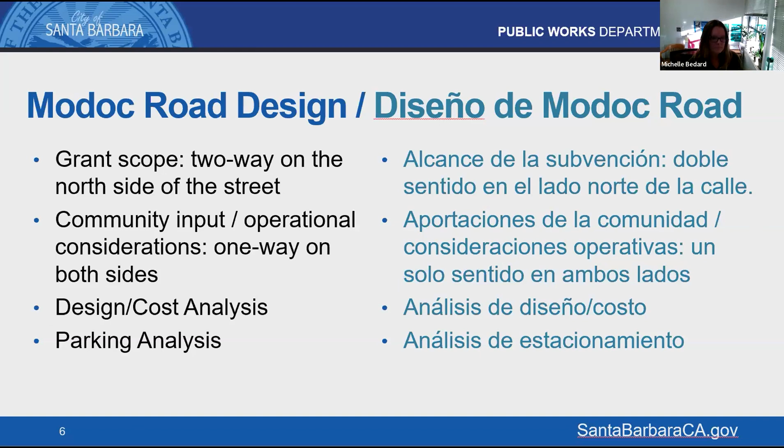One of the benefits of transitioning to a one-way design is that the two-way design, with the limitations of the existing right-of-way, would have resulted in a rather narrow bike path for a two-way configuration.

This is an example picture from J Street in Davis of a two-way design, street level bike path protected with bollards. Keep in mind, this design is wider than we could have fit into the existing Modoc Road right-of-way.

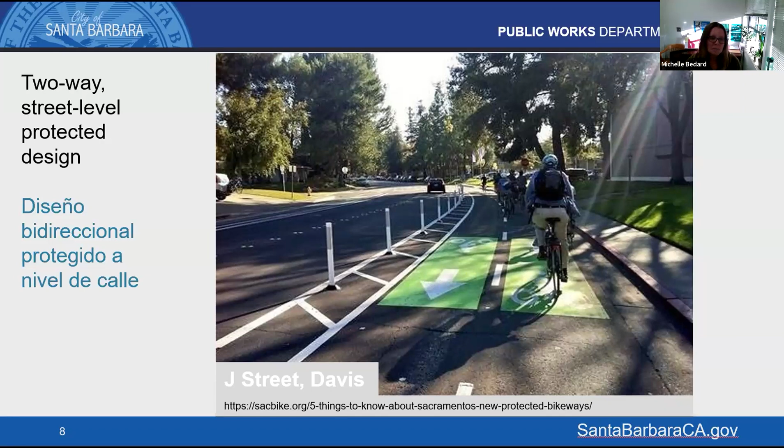Now for the revised design. In plan view, after receiving community feedback, the project team evaluated the design, connections to existing bike facilities, and impacts to on-street parking, and is presenting this revised concept plan for a one-way bike path located on each side of Modoc Road between Mission Street and Las Positas Road.

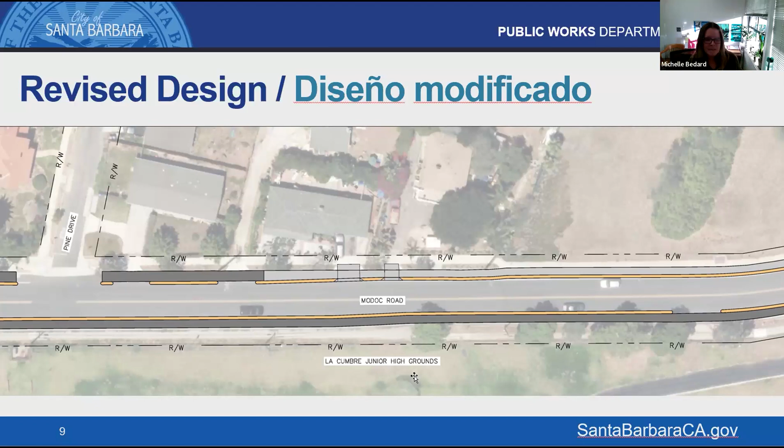In the next few slides, I will share a few examples of these types of designs. Our concept is what we call a one-way path, street level, curb protected design. This is an example from NACTO, the National Association of City Transportation Officials, providing a visual representation of a proposed one-way street level curb protected bike path.

In this instance, you'll see sidewalk on the right, a landscape buffer between the sidewalk pedestrian zone and the bike lane, and then a curb protected buffer between the bike lane and the vehicle lanes of travel. This demonstration also shows parking and vehicle lanes of travel to the left.

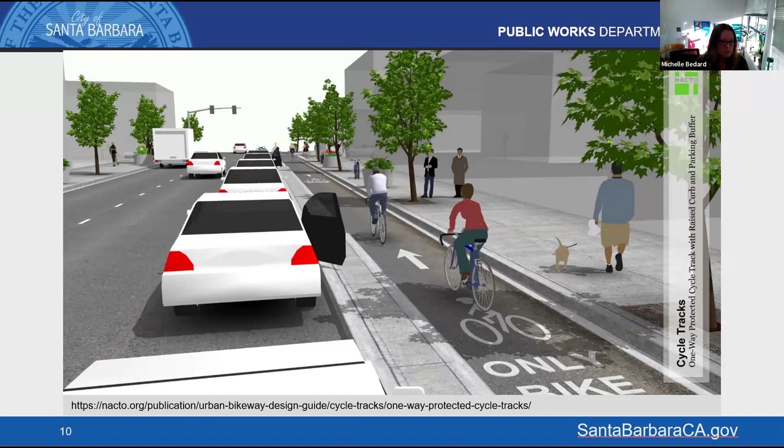Just again, a picture view - this is a recent example, 17th Street in Santa Monica. This is the kind of design we are looking at for an on-street level curb protected bike lane.

Just a few more pictures and examples, also from 17th Street in Santa Monica, so you can get an idea. The sidewalk is over here on the right, separated with some landscaping, and then the on-street bike path with curb protected barriers. Similar examples on both images.

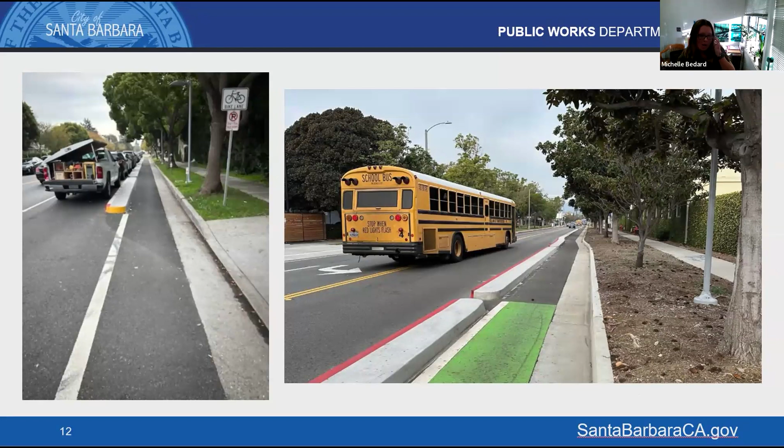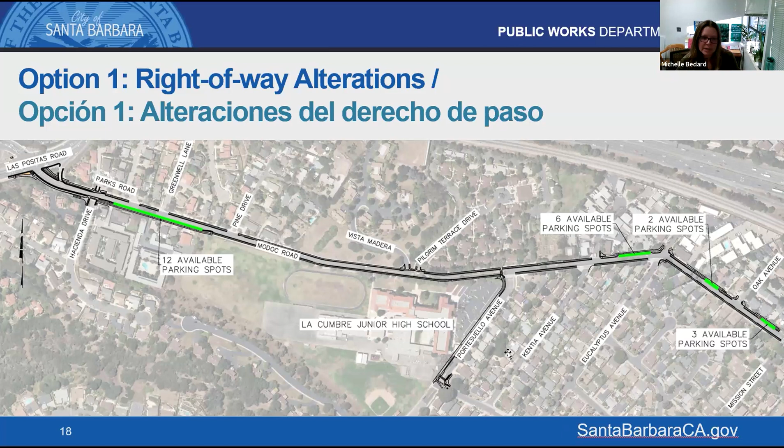Those alterations are primarily focused in this area, which is why option 2, which does not involve alterations in the right-of-way, does not have those additional parking spaces.

Option 2 involves 12 new on-street parking spaces. These would be permanent new parking spaces offered 24/7, day and night, within the public right-of-way. This is between the firehouse and Hacienda Drive on the west side, just before Las Positas.

As previously mentioned, staff is continuing to study opportunities to maximize additional new on-street parking between the fire station and west of La Cumbre Junior High.

Just to point out, you might ask why they can't provide parking on the whole stretch of Modoc between Las Positas and Mission Street. The key component of the project is to provide safe modes of travel for all road users: pedestrians, cyclists, and vehicles.

The opportunities for new on-street parking are limited and will be focused in areas where the street maintains adequate visual sightline distances and sufficient safe widths for all road users, meeting minimum road vehicle travel lanes and minimum bike lane widths.

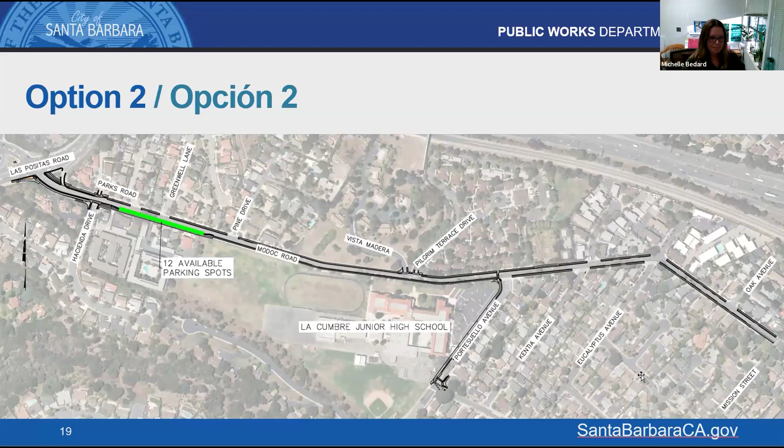That's a lot in a brief amount of time, but just to quickly share the next steps: we'll continue to hold community engagement meetings. We want continued community input on the design before we prepare final design plans.

We have to go through the environmental review process. We'll also go through courtesy review boards by the city boards and committees. Construction is anticipated in 2027.

This is a large project with many different components, so we hope construction will begin earlier than 2027 wherever feasible.

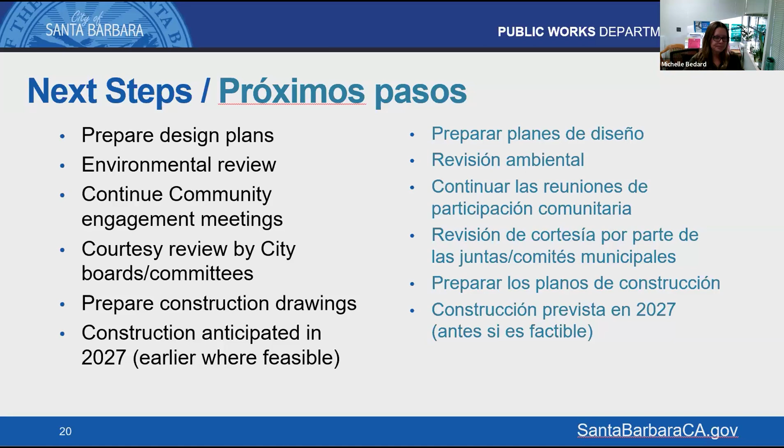Just to share how to stay involved, this is the city email and project web address. You can attend public hearings and community engagement meetings, which will continue to be posted online and to our project website. We go through many news source avenues to publicize our community outreach meetings.

We want people to attend. We want people to share their voice.

So again, I'll use this opportunity just briefly to say, if you can, please attend tomorrow's open house. It will be held at La Cumbre Junior High at the same hours, 5:30 to 7. You'll have the opportunity to review the plans in person, ask questions of staff, make notes, and provide your input.

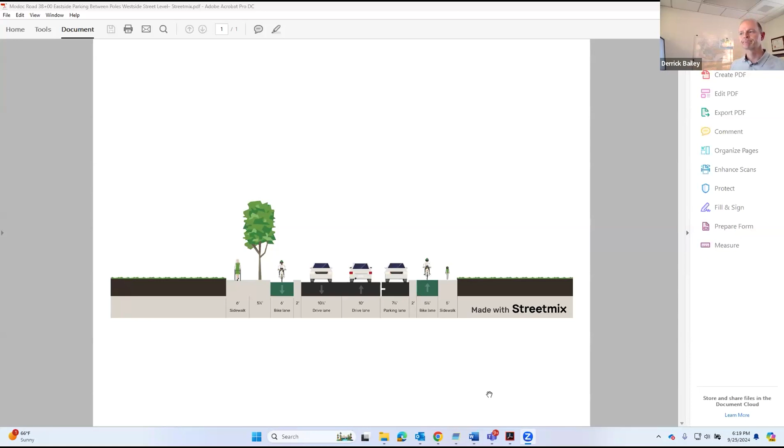I'm going to stop sharing now. One question, Derrick - I'm not sure if we have the most recent data - how many riders are currently using the on-street bike lanes? I can look that up while you're answering questions. Okay, if we have anything. Great.

One comment was just thank you for reconsidering it, having a one-way path on both sides. This person was very happy that we're listening to the community and implementing this change.

Teresa, there was one question that was in Spanish.

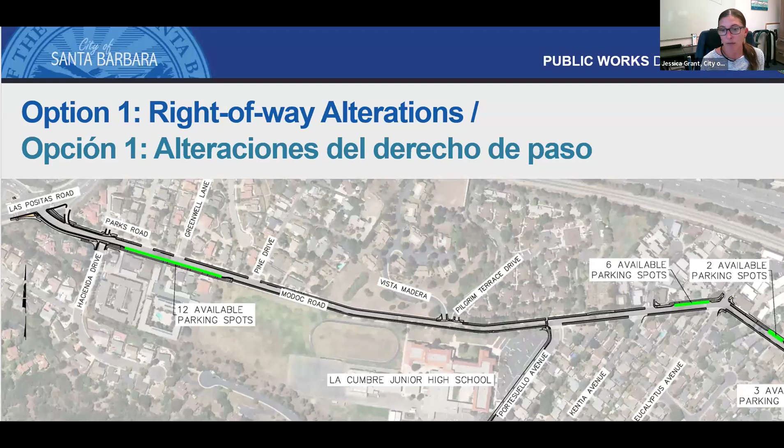The question is from where to where would the parking be, 7 days a week? Michelle, if you could navigate to that screen showing where there would be additional parking in both options. Teresa, if you could translate: yes, but roughly just north of La Cumbre Junior High and Hacienda Drive, and then approximately south of Kentia Avenue to Mission Street. Okay, thank you.

One question was about tomorrow's meeting. It's an in-person meeting, an open house format. It's the same material we'll be covering, just without a formal presentation. We know everybody's busy, and sometimes they just need 10 or 15 minutes to take a look, and then they can be on their way. So if you've had the webinar tonight and then have a bunch of questions come up, you can meet with us in person to follow up on additional details. So it's just a little bit more personalized in the in-person format, but we love the webinars too.

I can't thank the community enough for all the great questions that you have.

Hey Jessica, just while you're looking for your next question - counts done last January, so January 2024 at Modoc and Portesuello, there were 2 days worth of counts, and there were between 300 and 350 per day. So that was January, so we'd expect that to be a little on the low side, as cycling activity tends to drop off a bit in the winter.

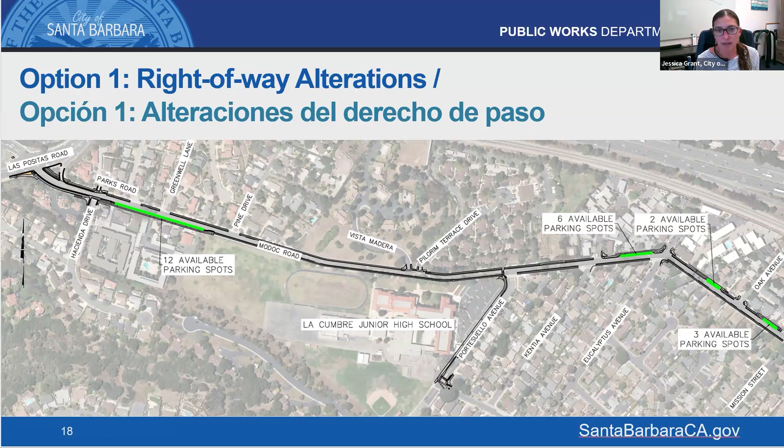Michelle, if you could go back to the last slide of how to contact us. You could follow up in an email, because I don't have a name contact to go with that question. If you could send us that question, we can get back to you later on that.

Just an appreciation comment: love having the multimodal paths around town. Great for families, runners, with strollers. So the project is much appreciated. Thank you for that comment.

The city spent a lot of money making a new bike path on Mission and San Pasqual. I'm assuming that this new proposed bike path on Modoc would connect to San Pasqual. This bike path is blocked for hours on a daily basis by taco vendors. Is the city going to allow these vendors to use the new bike path in the same manner? Thank you for that comment.

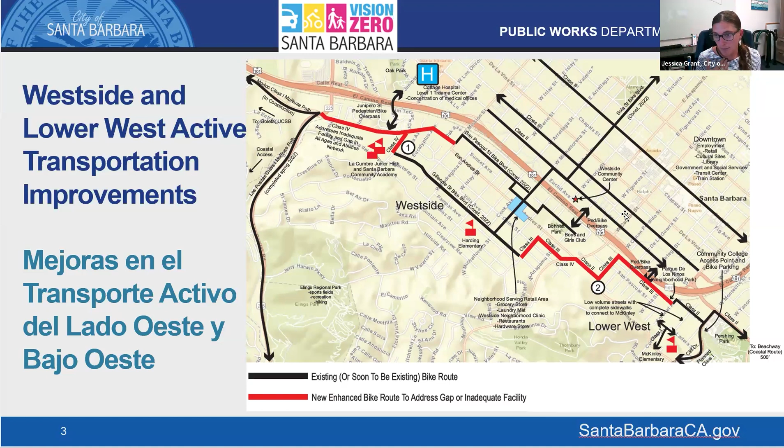Yes, this path does hook into that multi-use little path segment. It's a very little piece, but such an important piece of a bike route connection. So if you're coming from the San Pasquale neighborhood going to La Cumbre Junior High, you could hop on that little multi-use path section and then go right into the protected bike lane. And the vendor issue is on the radar. There's been lots of enforcement on that, but feel free to reach out if you see more observations, so there is a dedicated team for that. They are not allowed to vend on bike paths.

Can you go over the improvements on Pedregosa and Manitou again? Oh okay, yes, right there. So that's a critical missing piece link of sidewalk. It's kind of a blind turn, but it's a very popular walking route in the neighborhood, so a sidewalk would be filled in there where currently there is none.

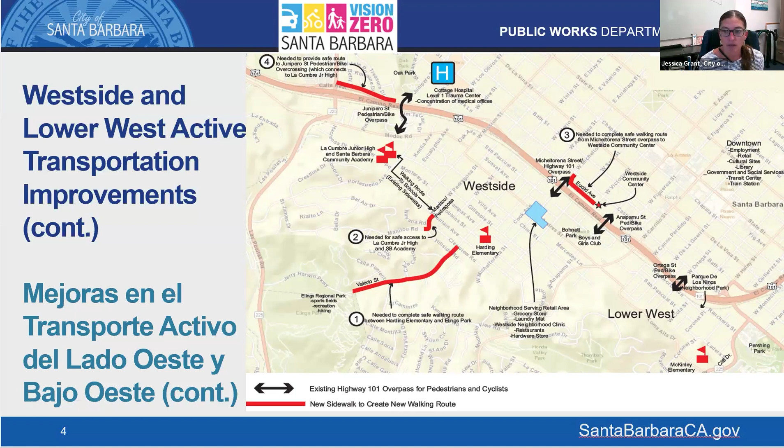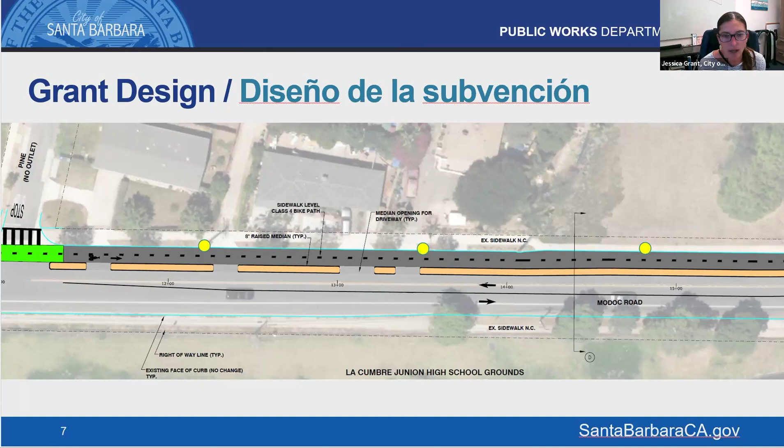Yeah, we can explain why there wasn't a two-way on the school side of the property. Michelle, can you get to the Modoc section where we see the whole path? Essentially, there was an issue carrying through a two-way path on the school side of the property. Right at Kentia and Eucalyptus Avenue, those streets come in at a skew, and there was concern for visibility of cyclists traveling northbound if it was on the south, or school, side of the street, with drivers not seeing oncoming cyclists. So that was the main reason why initially, and as part of the grant, it was on the non-school side.

Then what we heard from the public, and considering all the different types of cyclists and further analysis, in this particular section the strong community consensus was to change it from a two-way to a one-way. Mainly because we have more room, it's more predictable movements of what drivers would expect, and there's less stop control for the cyclists. Again, this is a busy school route and commuter route as well.

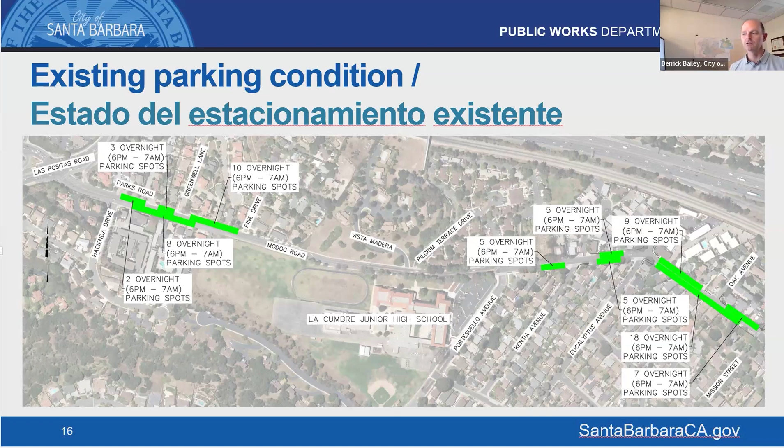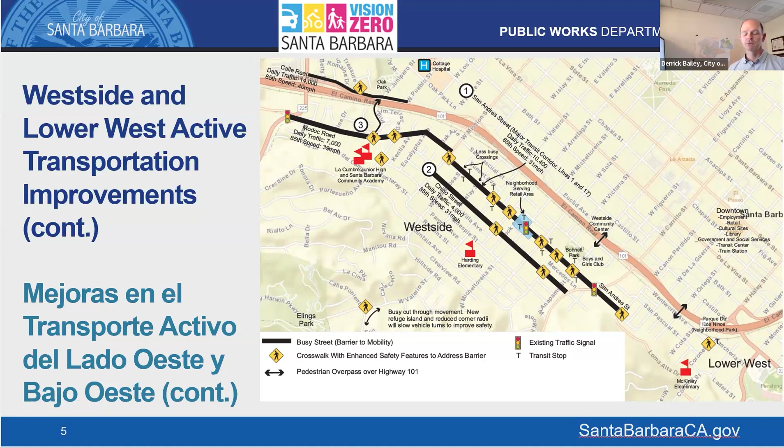There's not going to be any more Measure C funding available. There's a lot of needs in the city: infrastructure, maintenance, and a new police station that's going to be in construction in the near future — that's all funded through Measure C. So we can't look to Measure C to fund more of this project, but we are looking for potential cost savings in other areas. Because this is such an important piece of the overall project — a critical bike connection that we really need to get right and that needs to be high quality — if this section ends up costing a little more, it may mean there are other features in the project that we can't deliver. That's the big picture funding-wise, but for now we're focused on making sure we're meeting the community's needs.

There was the question: is there any plans at the intersection of San Pasqual and Anapamu, right in front of the Boys and Girls Club? People drive fast through there and lots of kids cross that intersection.

Completely agree with you, there is that project. We were able to expedite that intersection, so most of the construction for this grant-funded project will be occurring in 2027. But the area that Michelle is circling right there, there's a few intersections on San Andres that we were able to get additional grant funding for from other sources, Measure A and the Highway Safety Improvement Program, and construction will be starting later this year.